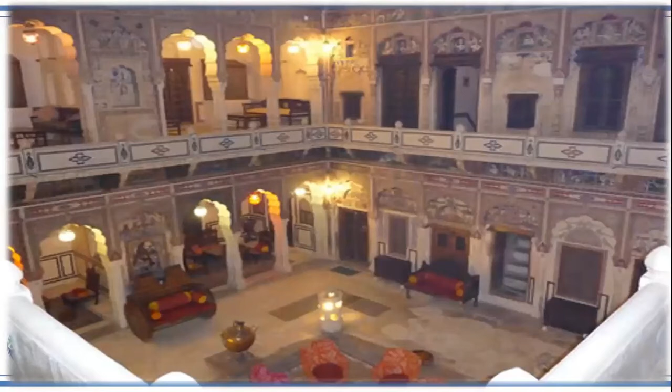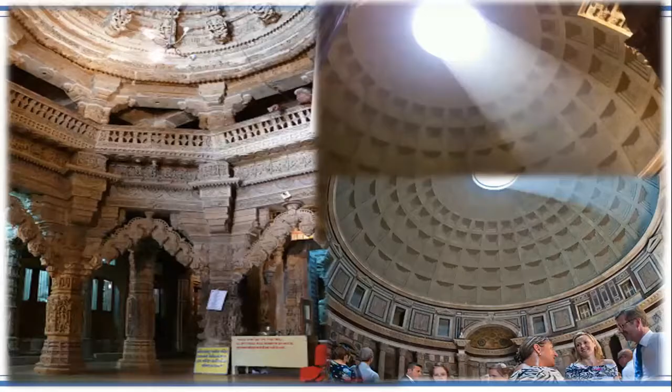So what's best in this? You have beautiful daylight, you don't need artificial light. In fact, in temples you don't have artificial lights at all. You have good ventilation, and the structure remains relatively cooler compared to the outside ambient environment, even in peak summers.

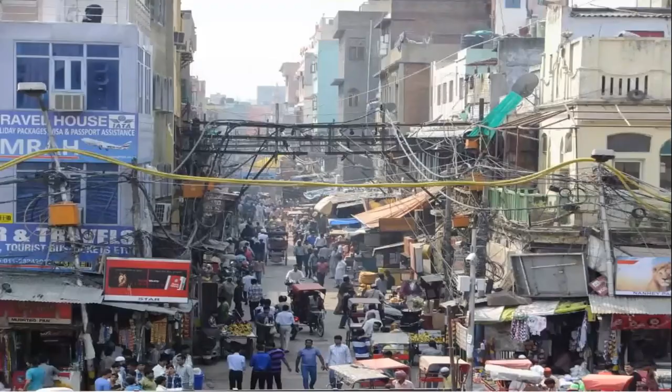Why are we talking about all this? It may not be directly related to what we're going to study, but it forms the basis as to why we are going through these codes. The main reason for this unplanned development is the lack of implementation of codes. It's not that we don't have codes - we definitely had codes, even ECBC was there in 2007, but its implementation was not very mandatory. Right now there's more emphasis, and more reason that we need these codes implemented.

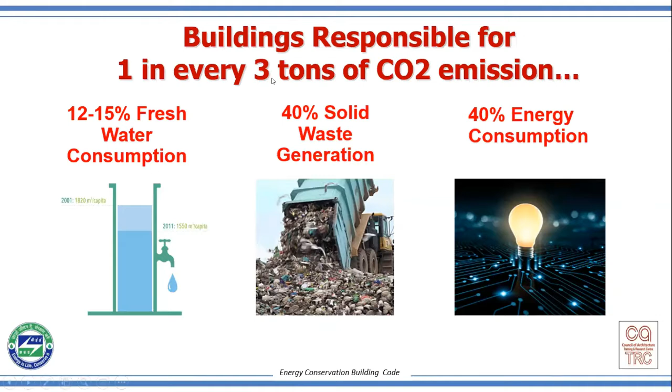The other part we're going to see - as Pallavi already explained in brief - is that the main concern here is energy. Every building uses about 40% of the energy that is generated, and in turn emits lots of CO2 emissions. So where is this energy consumed? Typically, if I take a typical office building, this would be a pie chart with roughly 5% here and there, but most of the energy consumption would be in air conditioning. Due to climate change, we can't probably live without air conditioning. So the main consumption is air conditioning, and the main area where we can save energy is also air conditioning.

Apart from lighting, which is the second most energy consumption, we need to first understand what contributes to air conditioning load and how best we can reduce it.

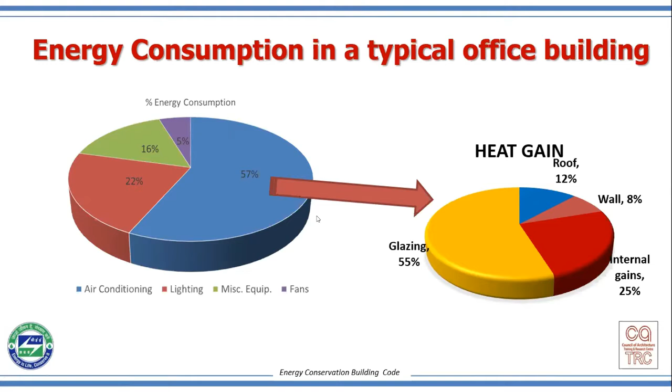If I break up this air conditioning load or heat gain, it would be more towards the envelope part, wherein more than 50% is in glazing. The second component would be roof and walls, and 25% is humans and equipment in the building. So more than 70-75% of heat gain is due to the envelope itself. That's where we have to target, and see what measures we can take to first reduce the requirement of air conditioning, so the consumption also reduces automatically.

Now, who all can contribute towards this energy efficiency? Most of the time we think that energy is a baby of the MEP consultant, but not entirely. The MEP consultant or designer is only a part of it.

Everyone I've mentioned contributes: the owner has to take decisions and shell out money. The architect is the first initiator of any building, so he's the main person who will design how the building has to be, and that forms the basis of whether the building is going to be energy efficient or not.

A landscape architect may or may not contribute, but actually it's definitely important, because how my microclimate is designed with respect to the building matters a lot. That will reduce my ambient temperature and turn away the heat that's going to come in.

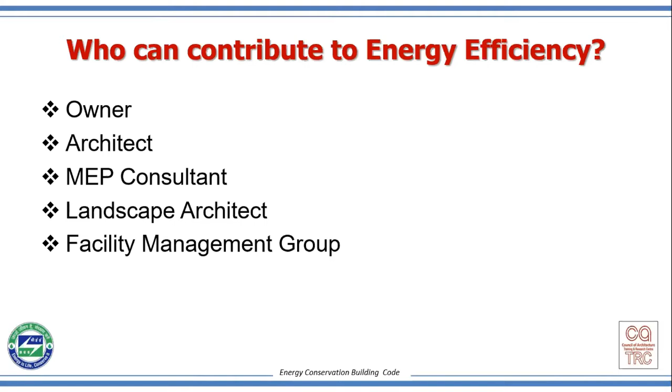The facility management group contributes too, because he's the person who manages the building and knows how it operates. His perspective can help us a lot in terms of designing the building, as well as designing the other equipment or air conditioning systems. So by and large, everyone has to contribute, and contribute in a very positive manner, so that the whole building is very efficient.

Now, what approach do we go for? The three basic ideas I've jotted down in this slide are: the form of the building, orientation and shading, and building materials for the envelope.

The first two are very much limited and maybe project specific or site specific, because most of the time you may not have the liberty to design the building as you want, in terms of shape and size, facade, or orientation, since the site probably allows the building to be designed in only one particular manner. But the third, building materials, is always something we can select in a much better way.

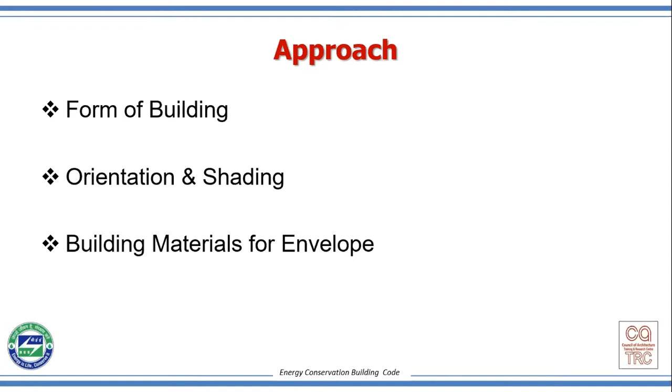To start with form, I'll not begin with basics or theory, but directly take a case study we did for a building in Bangalore. I'm taking a very temperate climate, maybe one of the best climates in India, so the impact it can make in this climate, you can magnify for hot and dry as well as warm and humid climatic conditions.

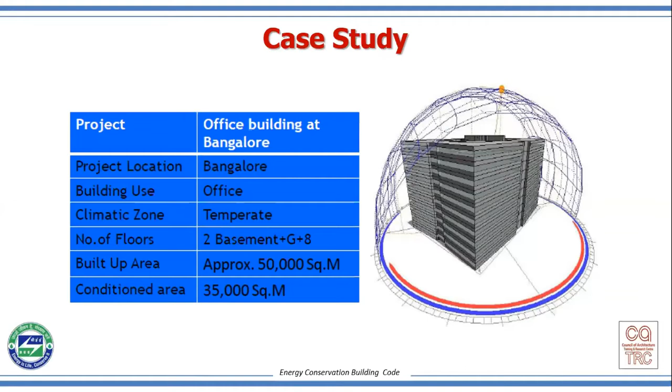What I'm trying to show is the impact of some scientific studies we can do while designing the form. I'm keeping the total built-up area of the building as it is, and selecting four different types of shapes of the building that are quite common and can be considered.

First is a squarish type of building, not a very elongated rectangle. The second is an elongated rectangle design. The images you see below are from daylight software, to understand how much daylight can be penetrated, and we've also analyzed what the heat gain would be.

The third form is slightly curvilinear—not typical blunt edges, but given curves for a good artistic look. The fourth form is similar to the second rectangular building, with the modification that the two lateral parts have been shifted down at 45 degrees, giving a different shape and form.

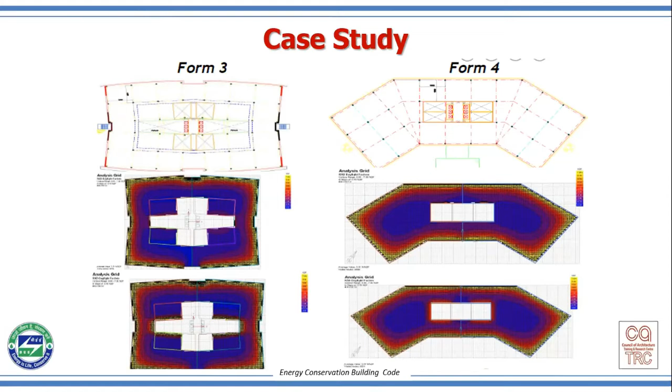For all these four forms of the building, the built-up area is constant. So what is the analysis? The first is a rectangular type of building, but it has a greater depth.

The second form has a shorter depth, so the daylight penetration is much more compared to form one. The third is curvilinear. With the curves, you have more surface area, so whatever heat or sun rays are incident on the building, you have a larger surface area, so the time taken for heat to come inside is much more, because the surface will get heated up first, and then the heat will move inside the building. The fourth form has the advantage of self-shading due to its shape.

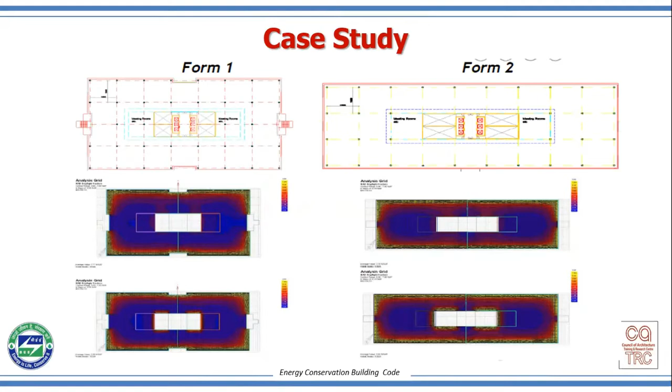So lesser amount of heat definitely comes through compared to forms one and two. We also had space to make an atrium or skylight to induce more daylight in Form 3, whereas those benefits were not there in Form 1, 2, or 4, because those areas are very small, and adding a skylight or daylight part would reduce the carpet area. So daylight penetration is much more in Form 3, making it the most preferable, since you have good daylight as well as lesser heat ingress compared to all other forms.

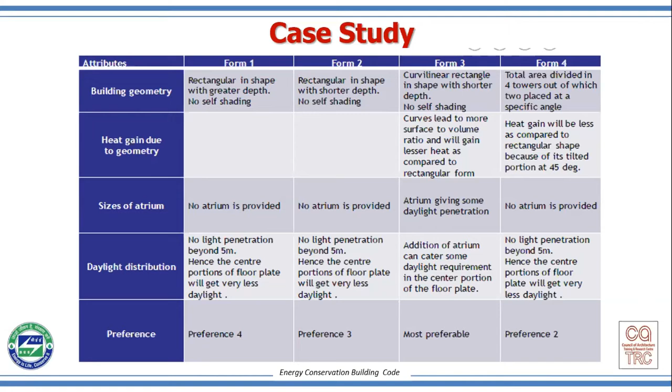So this is some form of study we can do before starting construction, to analyze how the buildings would behave. The second part is orientation. So which is the best orientation?

By thumb rules, the north-south orientation is best, with more facades or openings on these two sides. But if you analyze the sun path diagram, as you move towards the south, maybe apart from Bangalore, the north facade becomes very critical too, because for more than four months you'll have good sun over there, so your treatment would be different compared to designing a building in Delhi. So it's very important which location you're in, and not just designed by thumb rule.

Most of the time you don't have the liberty to orient your building as you want. But wherever possible, if you have a good site area, you can orient the building in the best possible way. If not, you can design your interiors so that buffer zones or core areas face west or south, of course as permitted by Vastu and other rules and principles.

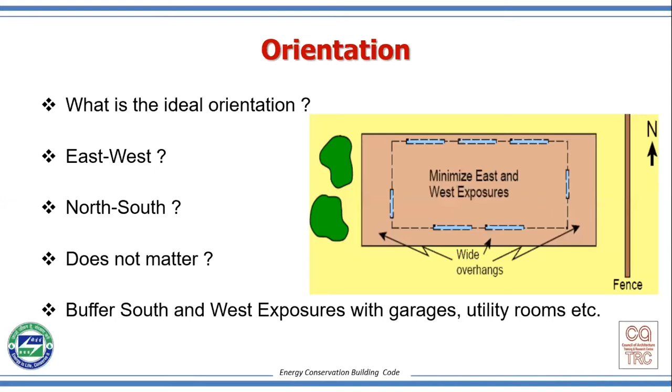I'm taking another case study, courtesy of the IGBC headquarters in Hyderabad. How did orientation play a role in this building? This was the first green building designed in India, and it received the highest rating awarded at that time outside the US. So before actually constructing the building, all measures and different analyses were done.

One of the analyses done pertained to orientation. They had the liberty because the site area was quite huge and the building footprint was very small. So this is the existing orientation, at about 180 north, and the energy consumption you can see is about 72,750 annually. This is a smaller building, less than 20,000 square feet.

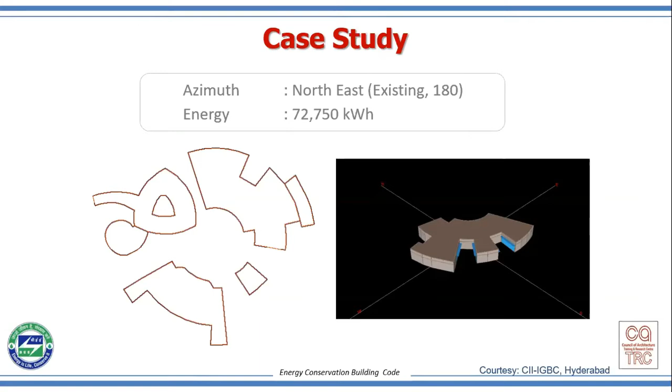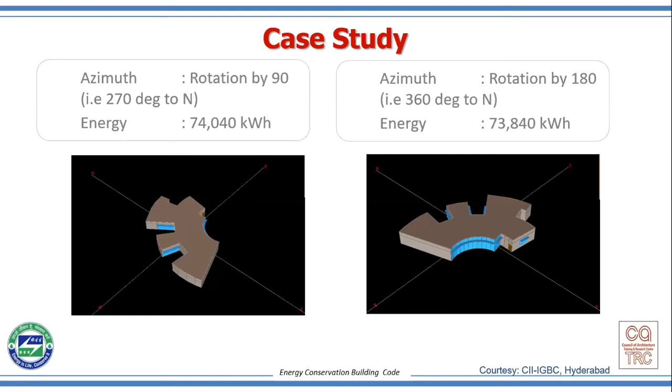If I rotate the building by 90 degrees and by 180 degrees, the consumption varies because the window areas and their location change. And if I rotate it by 270 degrees, the orientation changes and so does the consumption. Analyzing all four rotations, the current building is the best oriented, with the least energy consumption, while rotating it by 90 degrees gives the maximum consumption. Comparing minimum and maximum, almost two percent of energy is saved for this small building, where the window to wall ratio is only 17%.

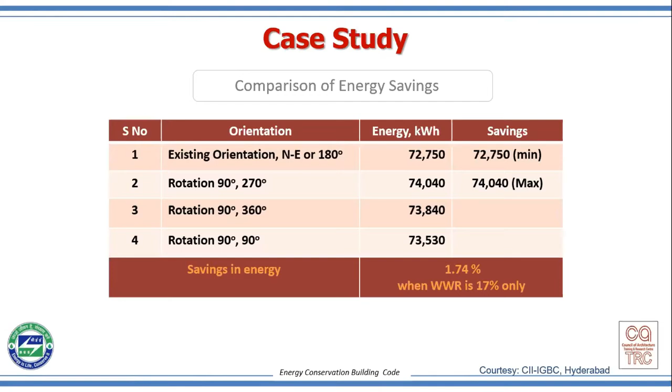If I just magnify it, the savings may not scale up directly, but even a couple of percent savings for a building of about one or two lakh square feet is quite huge, and that too without any investment. So definitely this is something we can take care of.

Now moving on to the materials or the envelope. I'll also take the shading part along with this material part, specifically the glass, because when you don't have the flexibility of orientation, shading is another important aspect which you can design to try to reduce consumption.

As we saw in the first pie chart, glass is a significant contributor of energy and a significant contributor to heat gain. So of course we cannot have a building without any glass, it would be a bunker, and definitely a very dull place to stay. So you do need glass, but you have to have a correct balance where sufficient daylight comes in while restricting a lot of heat as well.

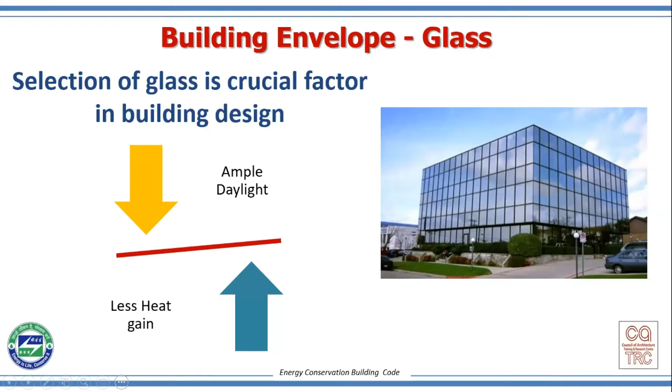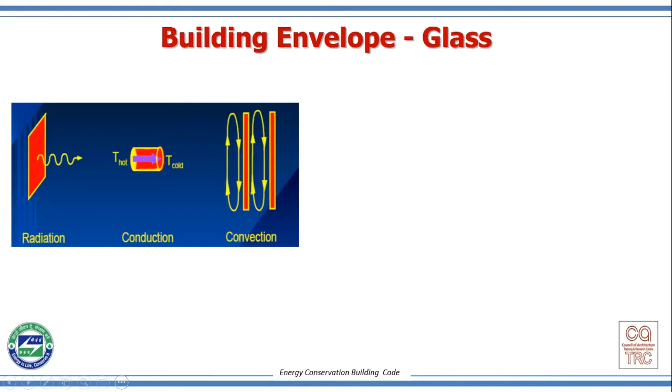Why is glass very important or significant? Because it exhibits all three forms of energy propagation. The forms of heat transfer we studied in school - conduction, convection, radiation - all three are shown by glass. That's the reason it is very critical to understand and design.

As I was saying, conduction - the heat transfer due to conduction - is basically through a material. Any material will get heated up, and that heat will propagate towards the inside. So when the heat is incident on the glass surface, it will get heated up, and the material will transfer the heat inside the space.

Now what is convection? Convection requires some form of medium to travel, which is air. So whatever air currents are near the window, they will get heated up with respect to conduction and radiation, and that air which flows inside the building will transfer the heat inside the building as well.

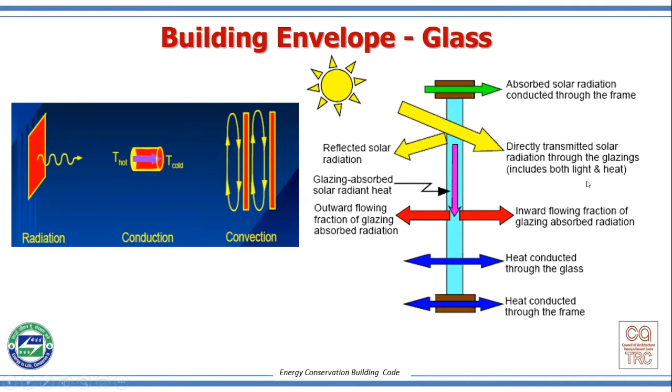Now the most important form of heat transfer, which is radiation, is there in this glass. If you just stand near the window, you will be feeling the heat - that's how heat is directly transmitted through the glass into our space. So that's how all three modes of heat transfer are shown.

Now the properties of glass, apart from all opaque assemblies like wall and roof - glass does have a U value. U value is nothing but the heat transfer through conduction. It requires a material and heat transfer due to the different temperatures at the two ends of these materials. The lesser the capability of the material or glass to transfer heat, the better. So definitely the thickness plays a quite important role.

Most of the glasses that you have in residential buildings are 5 or 6 mm glass, wherein the U values will typically be in the range of 5.6, 5.7 watts per square meter Kelvin.

Now if you see a commercial building, you will also see double glazed glasses, or what we call DGU - double glazed units. So there's a 2 6 glass with a sandwich air gap of about 12mm, which might be an inert gas like argon, or might be air or a vacuum fill. These glasses have much better properties in terms of U values, and they reduce the heat coming inside the building because of the air gap, which traps the heat. So here typically the U value would be in the range of about 1.7, 1.8, or max to max 3 watts per square meter Kelvin.

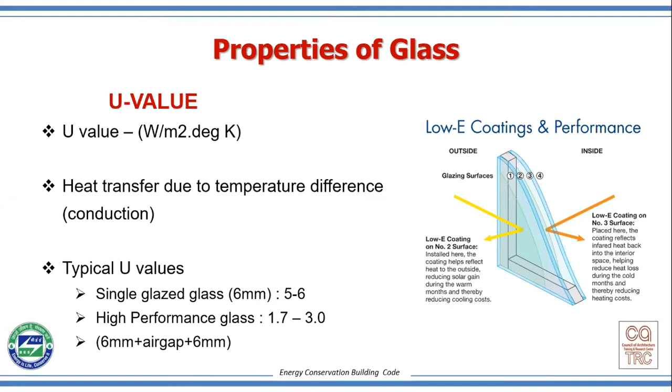So in short, the U value is basically due to the heat transfer through the material.

Now coming to the second property, which is more important as far as a tropical country like ours is concerned - it's basically called the shading coefficient, or you can term it as solar heat gain coefficient, or some people call it the solar factor. So what exactly is this? This is basically a ratio of the amount of heat that comes inside the building to the amount of heat that is incident on the glass.

So basically, if 100 is the amount of heat incident on a surface, and if I let 60% of it in, so my ratio is 0.6, then the shading coefficient of the glass will be 0.6. Now how is this calculated?

The basic minimum glass known to humans is clear glass, which can be manufactured. We assume through that clear glass everything comes in, there is no obstruction or restriction. So whatever heat is incident on this glass, 100% will pass. Now, with respect to that basic glass, how much lesser heat our glass lets in is the property called solar heat gain coefficient.

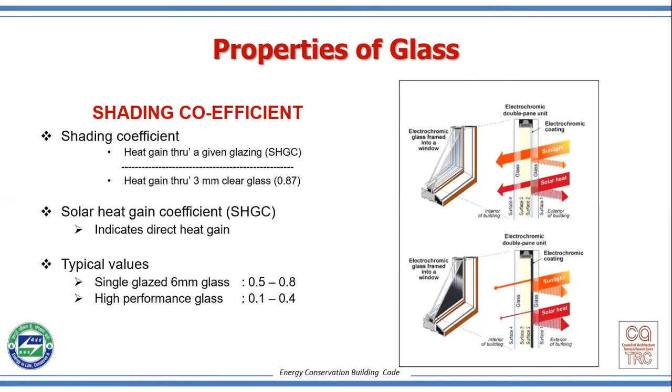The third important property with respect to light is visual light transmission. For the first two properties, U value and solar factor, we were talking about the heat component. But for this property, we look at the light component of the sun. Whatever amount of light is incident on the glass, how much we get inside is the property called light transmission. This is also in terms of ratio, ranging from 0 to 1.

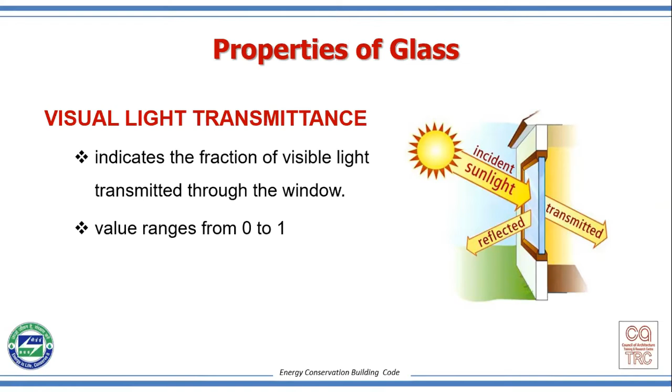An ideal glass, I would say, which has a light transmission in excess of 30%, is good enough for us to consider.

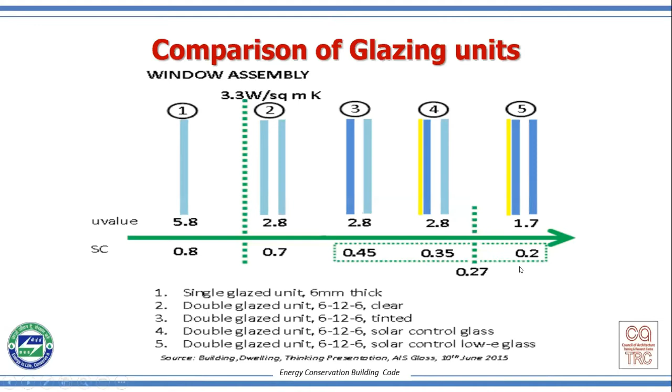Now, if I compare the glasses, you would see that single glaze clear glass is the basic minimum glass, which would not meet the code. But as I go down with performance glasses and tinted glasses, there are some glasses which will definitely meet the code in terms of prescriptive requirements. So 0.27 solar factor or SHGC is the requirement the glass should have if we go with the prescriptive requirement, and that can be met easily by a few of the glasses available.

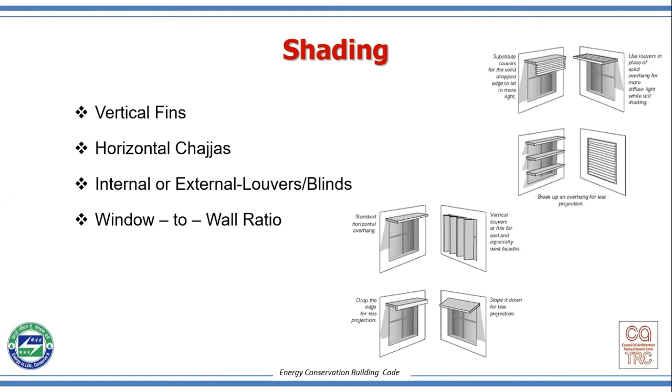Now coming to the shading part, there are different types of shades you can do: horizontal, vertical, louvers, tilted or angled chajjas and fins, and multiple fins as well. There are many types of shading patterns you can do to make the facade quite beautiful, as well as help reduce heat gain. Also, how window to wall ratio impacts the overall study is something very critical.

All these values we're discussing right now about WWR, shading, VLT and SHGC are governed by codes, with ideal values provided there, which we'll be seeing tomorrow.

For the north facade, we only did a small overhang and a thin, about 450 vertical fin. For other orientations, we tried different permutations. For east, west, and southwest, we included a small light shelf to reduce heat and direct radiation inside the building, while also increasing light penetration and the daylight area with a polished surface.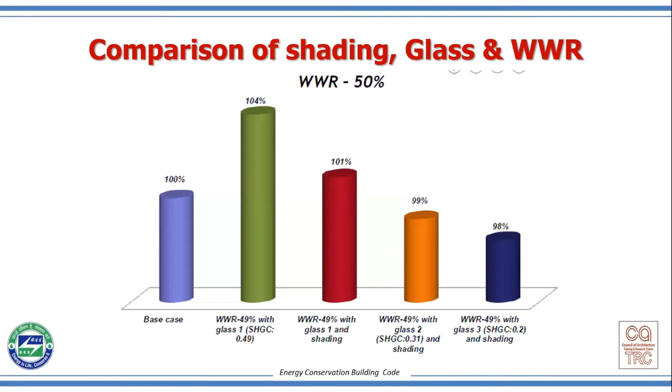One thing you can also analyze with respect to different manufactured data sheets is that if you go on reducing the solar factor, your VLT or the light will also get reduced, so the amount of daylight coming inside the building will be much lesser. That itself will be a problem. So what we want is not a very dark glass, so that artificial lights inside the building aren't always on. That's also something we need to ensure.

Now, what was the impact with respect to daylight inside this building? With 50% window to wall ratio and without any shading, I was able to have an average lux level of 518, and you can see all the peripheries had a high amount of glare. So definitely, most people would keep the windows covered.

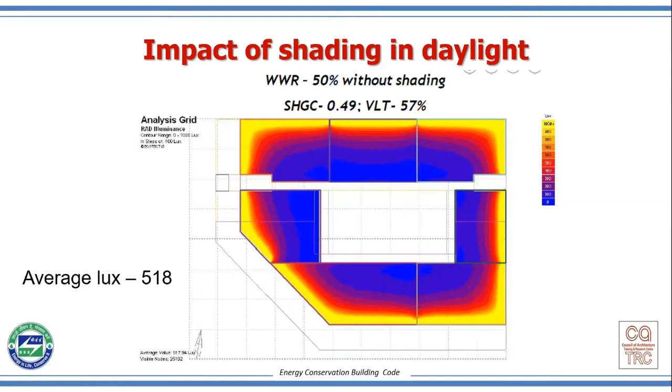I mean, with the blinds down, the windows would be of no use except for the outside world to have a look at the architecture.

Now I introduced the shading as I had already shown you. My average lux level reduced with respect to the shading from 518 down to 380, which is quite good enough still. Of course, deep inside the building you are not going to get daylight in any case, but at least the glare reduced quite significantly with that shading device.

And yet, I was able to take a glass which is not very dark, so not by the glass selection but by shading, I am able to reduce the heat as well as the glare inside the building. Still, 380 lux levels is quite good enough compared to NBC norms also, which say a normal office building should have about 300 lux levels. So I was having a win-win situation wherein everything is met quite properly.

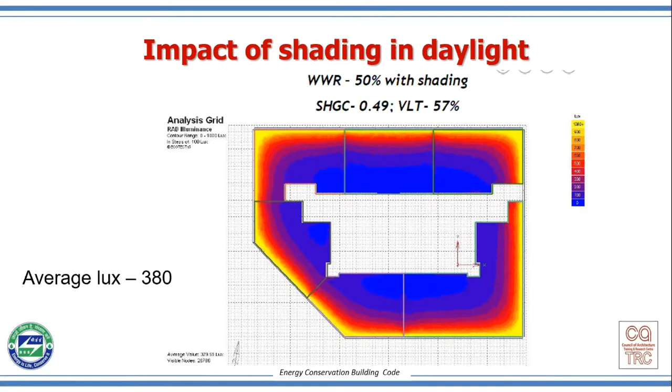So this was all about the glass, the main important part. Now moving on to the opaque construction.

The basic opaque construction of wall and roof is the concrete mass wall or mass roof. Here it would be pure solid concrete walls which would have very high U values, and due to that, a quite significant amount of heat will come through these structures. So most of the time in many buildings, you see the walls having a higher exposed area, and that's the reason these become very critical in high-storied or very tall buildings.

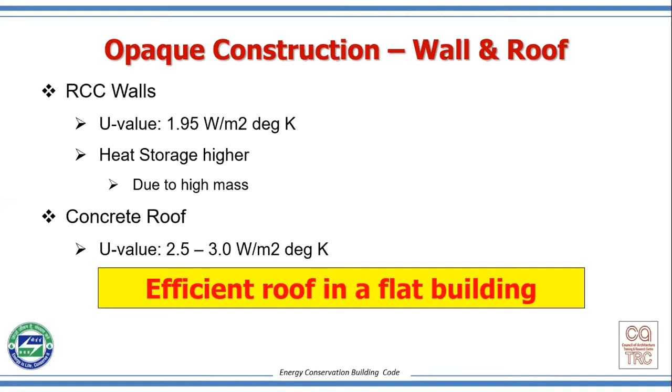So let's say if I have insulation and want to treat one of these two opaque elements, which would I treat? I would see what is the exposed area. If my roof is a very flat roof and the building is not multi-story, something like an institution building, I would definitely put insulation in the roof to reduce the heat gain through the roof itself. But if it's a multi-story building and I have the liberty to put insulation, I would try to put insulation in the wall to make that assembly a very efficient wall assembly, which would reduce the heat ingress inside the building.

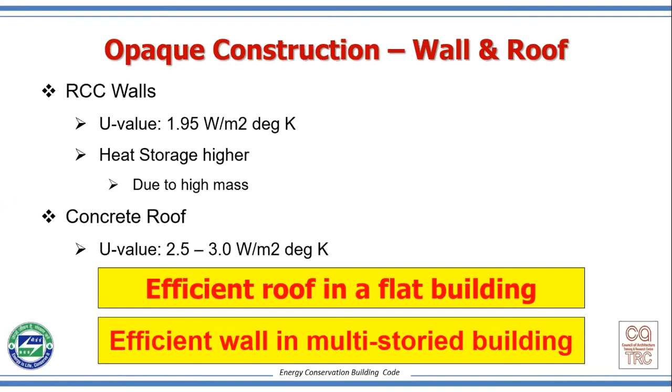Now, seeing the different types of wall assembly that we would probably design: brick wall, maybe with insulation or without insulation, cavity walls with insulation, concrete blocks, hollow concrete blocks, fly ash blocks, AAC blocks, which are mostly used nowadays and which are part of the DSR or SSR of many PWD institutions and other state bodies as well. So these are a few of the different types of wall assemblies that we would generally have witnessed and seen.

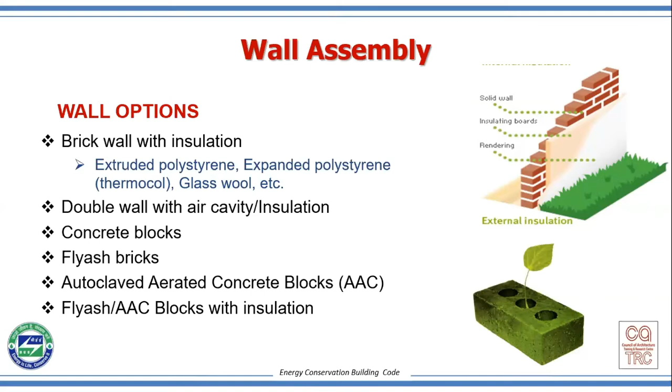I would take one particular type of wall assembly, which is the AAC block. Here, the most important component apart from the regular concrete block is the fly ash. This fly ash makes the block lighter in weight, so your cementitious component is reduced, and even your steel component is reduced. As far as thermal property is concerned, this fly ash creates air gaps or pores in the material, so whatever heat is incident on it gets trapped in these.

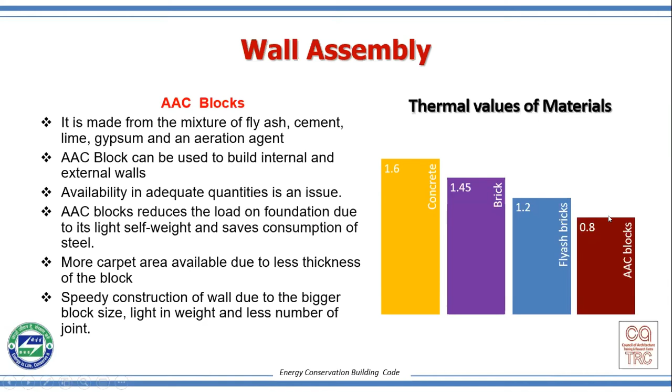So basically, due to these air gaps or pores, the heat is trapped inside these pores and cavities, and that's how a lesser amount of heat is propagated inside the building. So as I said, the light weight and reduced requirement of steel and concrete also make it a very lucrative material as far as wall assembly is concerned. If you see the thermal properties of the different wall materials, concrete has the highest U value, so more heat will pass through it. And as I go to the conventional materials, the AAC block has the least U value, so the least amount of heat will pass through this.

Now moving ahead to a sample example as to how the calculation of U value is done. With respect to different layers of the assembly, we have to calculate the R value. These thermal conductivity values are mentioned in the ECBC 2017 code at the back, so those values can be referred for each material. It's almost about 3 to 4 pages, quite an extensive list. You can determine the total R value, and by taking the reverse or inverse of that, you can calculate the U value.

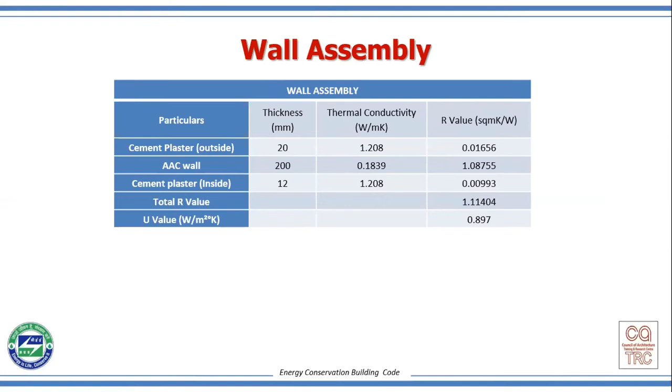So for each and every different type of material, you can calculate the U value and see whether it meets the requirements of the codes or not, and you can pick and choose the different materials that are available in that particular zone.

Moving to the roof assembly, there are again different options. First a normal slab, or a slab with insulation, or brick bat coba without insulation. You can also have a terrace garden, or a slab with brick bat coba and on top of it high reflective paint. These are the different options that help reduce heat gain as compared to a normal slab roof.

Now, if I have to do insulation, where would I do it - over deck or under deck? The same question applies for the wall assembly also. If I have to do insulation, would I do it at an internal surface, or at an external surface?

Ideally speaking, for a wall assembly it should be done at an exterior surface, so you restrict the heat from the source itself. You don't let your structure get heated up first and then try to treat it.

Likewise for the roof assembly, if I have to do insulation, I will do it over deck rather than under deck. Under deck is of course simpler, but once your slab is heated up, it will propagate through the walls and floor slabs into the building. The amount of heat ingress would definitely be lesser compared to a roof without insulation, but ideally it should be done over deck to restrict the heat at the source itself.

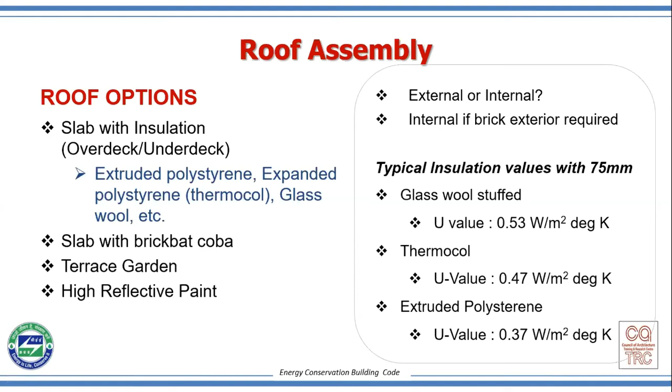So different options of insulation: glass wool, thermocol, extruded polystyrene. If I do this insulation with 75mm thickness, these would be the typical U values you can see in these options. Definitely XPS is a better option, giving the lowest U value, and the least amount of heat will come through the building.

Coming to a terrace garden - why is it so efficient, or one of the strategies to consider to reduce heat gain inside the building? You can see from this image, this is the exact image of a particular building or roof, located in Mumbai itself, and this is a thermographic image of this location. Wherever you see the tandoor tiles or concrete tiles, those areas are hot red, and the other areas are greenish in color.

If I consider the temperature difference, the temperature at the tandoor tiles would be about 50 degrees, and the temperature at the landscape area is 40 degrees. So there is a clear 10-degree difference in these areas. Just imagine if I have a flat slab roof without any landscape, the temperature at the roof would be 50 degrees.

Now you would definitely ask me that in no parts of India is the ambient temperature 50 degrees, so whatever images are being shown is not true or correct. But the temperatures we have measured are at this particular point and not at ambient. Over a period of time, when heat is concentrated on this surface, it gets heated up, and the temperature of that particular material definitely rises. To give an example, let me give a small analogy.

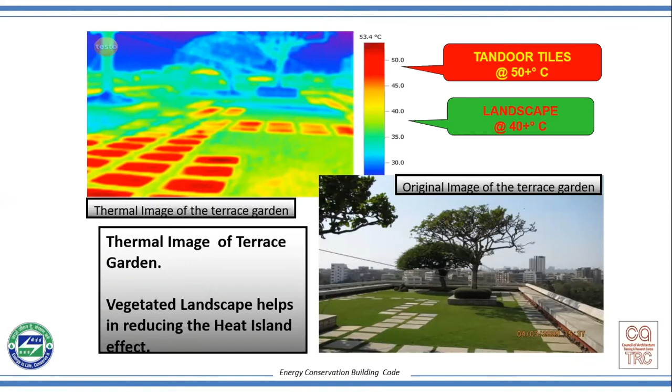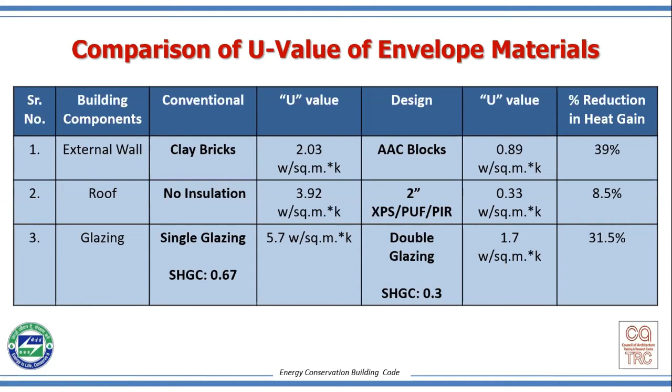Now coming to the end of the topic, I guess it's slightly before time that I've closed it out. This is a snapshot comparing the U values of different materials. The conventional materials—red clay bricks, roof without insulation, and single glazing—have these U values. If I compare with efficient materials, the U values are much lower, and you'd see at least 20 to 30% of the heat ingress or heat gain is reduced due to these energy efficient materials alone. Different strategies, if used, will only add to the percentage savings for this envelope design.

So that's it from me. I'll be ready to take questions.

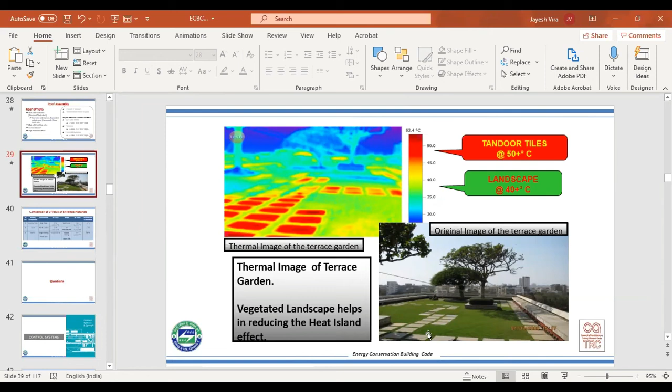Sir, I would like to answer your question. In the 2017 version, earlier it was 500 kilowatt. After that, in the 2017 version, they reduced it to 100 kilowatt, so that the code is able to cover more number of buildings, more commercial buildings. So it is always 100 kilowatt for commercial buildings in the 2017 version. Earlier it was 500 kilowatt, which has been cancelled now. Okay ma'am, thank you.

Thank you. Architect Prathamesh Joshi, are you able to unmute yourself?

Actually I have a simple question regarding facade treatments. As sir has already discussed the vertical surfaces like walls and facades, as well as the slabs, I would like to know whether inclined facades—those angular to the horizontal surfaces—can reduce the heat gain by a significant value.

Yes, definitely, it can reduce the heat gain by a significant value, I would say. But of course it would depend on which orientation or which facade you are treating, as well as the climatic conditions of that particular location. To give you numbers, shading devices can reduce the overall energy consumption by almost 2% to as high as about 5%.